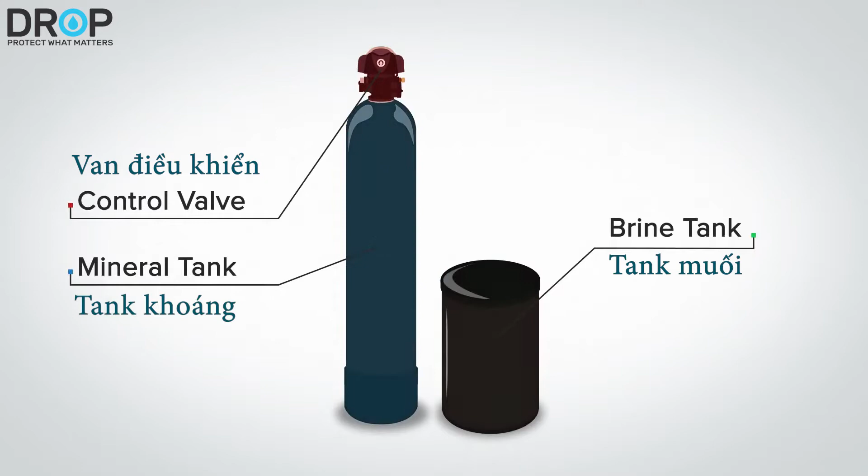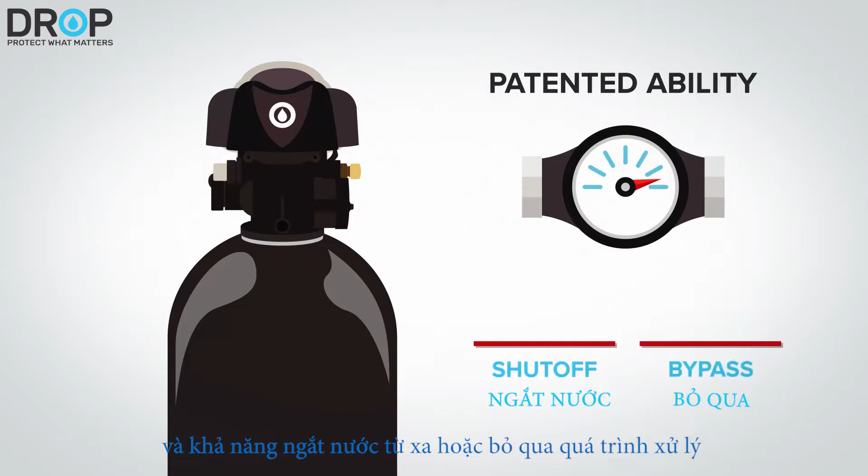The control valve directs the flow of water within the system, and in the case of the DROP control valve, it provides the patented ability to detect excess water use through its built-in water meter, and the capability to remotely shut off your water or bypass the treatment through its unique pro-quality piston design.

Untreated water enters the inlet on the right, and treated water exits the outlet on the left. Contaminants are flushed from the system to a drain from the smaller outlet, also on the left side of the valve. Under the control valve is the media tank.

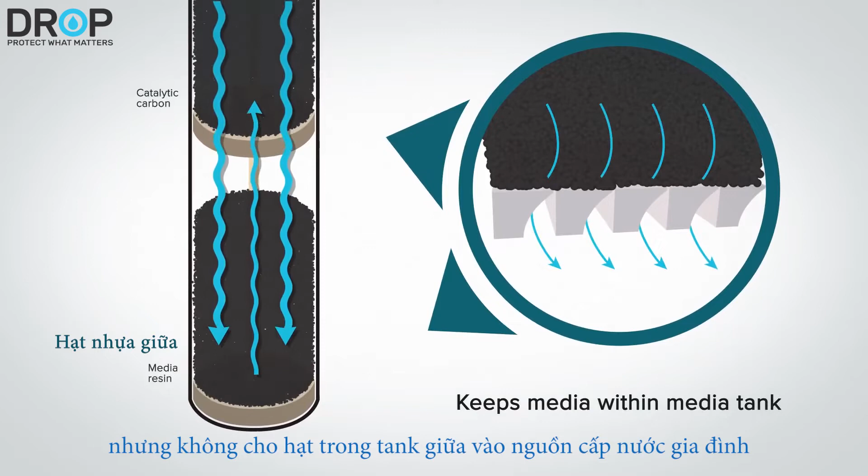Inside the media tank is a tube that runs to the bottom of the tank called the distributor tube. At the bottom and middle of the distributor tube are innovative plate distributors. The plate distributors have many small slits that allow clean water to flow through, but keep the media from entering the home water supply. This unique distributor enables DROP softeners to use less salt and water during the cleaning cycle.

The final element of the mineral tank is the media. DROP City softeners have catalytic carbon in the top portion of the tank for chemical reduction, and ion exchange resin in the bottom. The resin is what removes the hardness from the water.

There are several brands of resin available, but we choose to use Aldex 800 because of its long life, its high efficiency, and because it is made 100% in North America.

Connecting the softener control valve to the brine tank is the brine line. This tube has two functions: it's used to draw the brine out of the brine tank, and it's also used to refill the brine tank for future regeneration. The final component is the brine tank. The brine tank is where salt is added to the system.

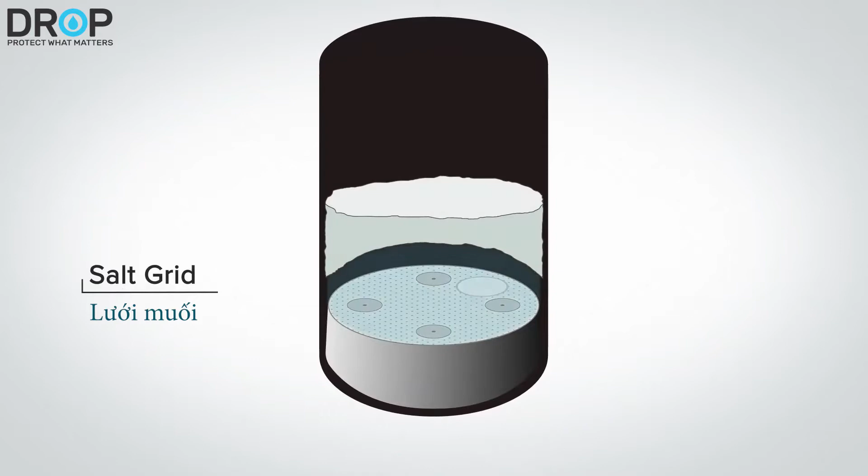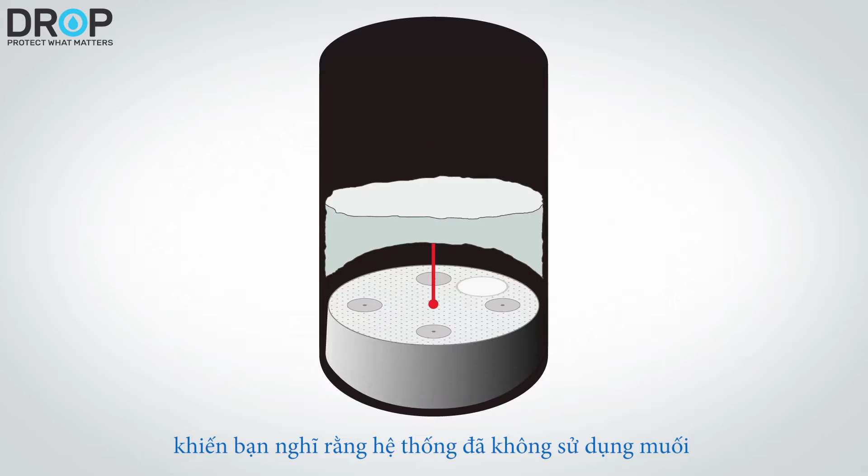Another standard feature of all DROP water softeners is the DROP low salt sensor. This sensor lets you know when salt has fallen below a minimum level before you run completely out, so you have a week or two to get more salt. Low salt notifications, like all system notifications, can be sent via push notifications to your smartphone, text messages, or email.

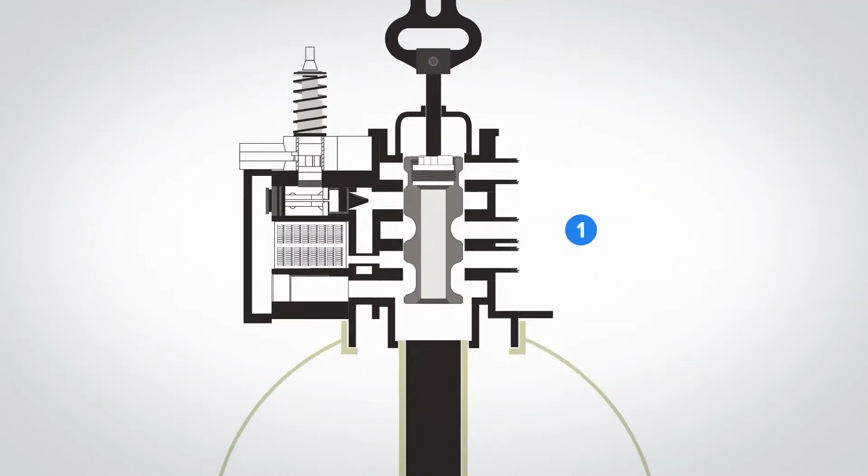Now that you have seen the elements, it's time to see how it works. By following the arrows, you will see the process starts with raw water entering the system. The water is quickly diverted down into the media tank, where it first flows through the catalytic carbon.

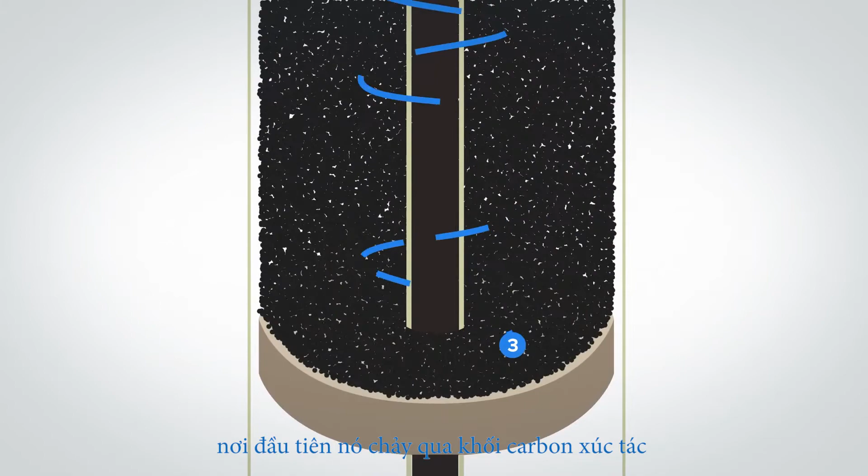The carbon removes chlorine and chloramines, which will improve the taste and eliminate odors. Next, the water flows through the resin. This starts the softening process.

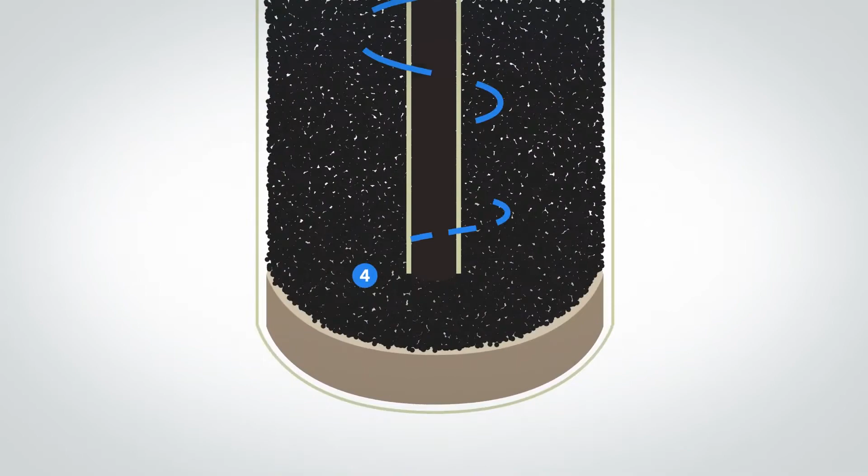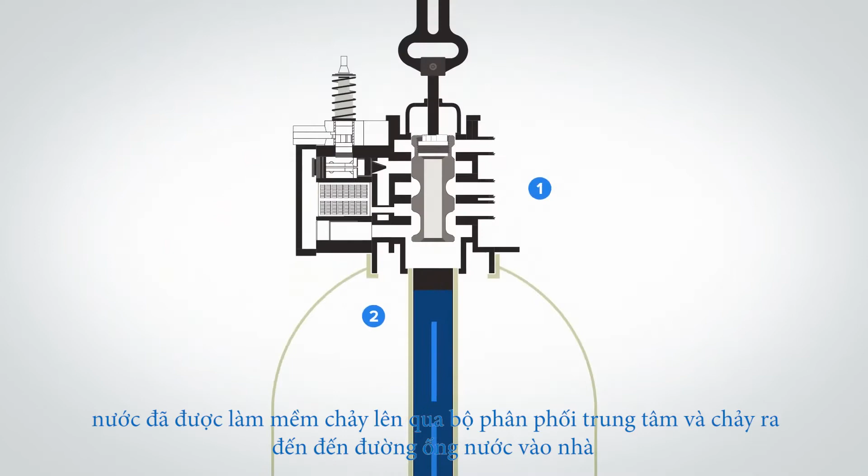Calcium and magnesium are attracted to the resin beads as the water passes through. By the time the water reaches the bottom of the tank, it's been softened. The softened water then flows up through the center distributor tube and out to the home. At some point, the resin will become full of calcium and magnesium and become ineffective.

When this happens, the resin needs to be cleaned of contaminants or recharged. We do this with a process called regeneration. There are 4 steps to regeneration in a DROP water softening system.

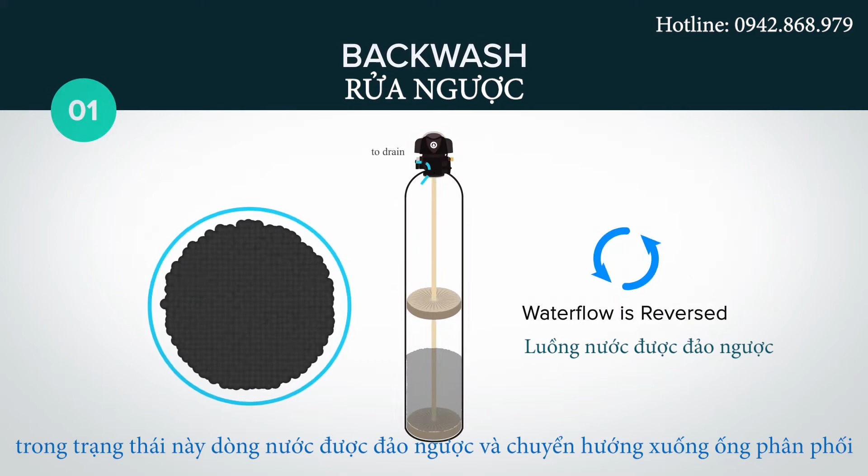Step 1 is backwash. This loosens or expands the resin. In this state, water flow is reversed and diverted down the distributor tube. The water is then forced up through the resin bed. As the water pushes up through the bed, the resin expands and the plate distributor creates a swirling action.

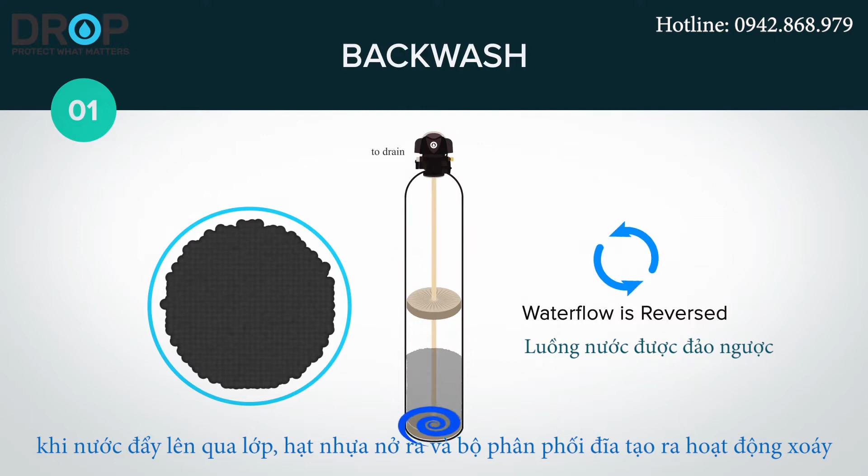Step 2 is brine draw. This pulls the brine from the brine tank and saturates the media tank with brine that is used to release the calcium and magnesium from the resin.

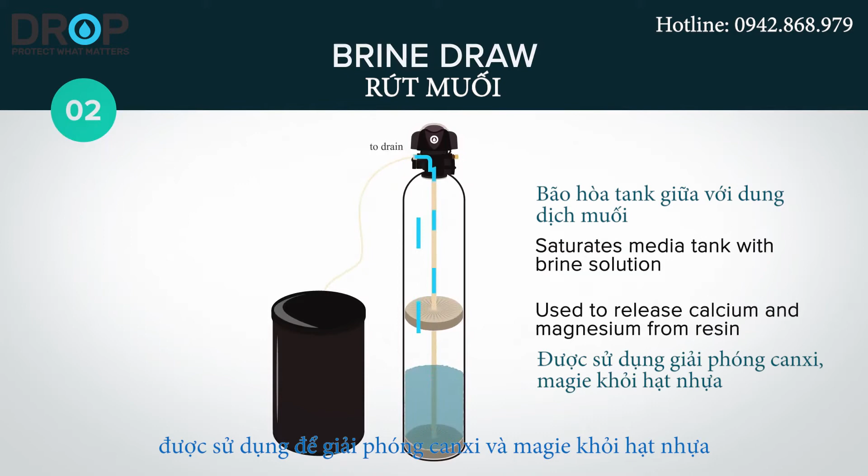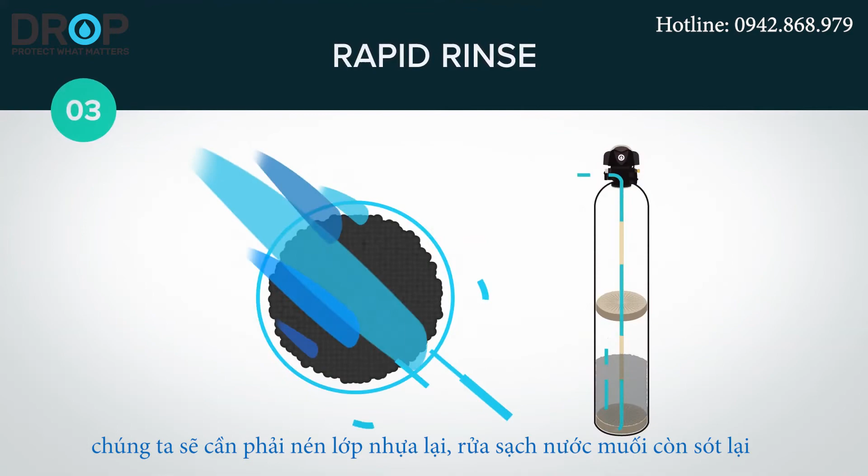Now with the media tank full of dissolved salt water, it's time for step 3, rapid rinse. Since our resin bed is still expanded, we will need to compress the bed back down and rinse the residual brine water and contaminants from the media tank.

Step 4 is brine refill. This completes the process of regeneration and puts water back in the brine tank so it can dissolve the salt into a brine solution to regenerate the resin in the future.

Users do have the ability to move brine refill to the first step if they desire. This is called Pre-Brining. If this option is selected, the brine tank will not have any water in it most of the time. When a regeneration is required, the system will add water to the brine tank about 2 hours before the process begins to allow the water to dissolve the salt into a brine solution. Pre-brining can help keep the salt in the brine tank from bridging, but will delay the regeneration process by 2 hours if you ever want to force an immediate regeneration.

In addition to all the benefits of a premium water softener, the DROP City water softener has additional benefits that are not available in any other water softeners in the world. DROP softeners have the patented ability to shut off water flow to the home.

This puts the ability to turn your water off or back on in the palm of your hand with the DROP Connect app. Even better, when the meter on the softener valve or an optional drop leak detector senses a problem with your home, the DROP softener will automatically respond by turning off your water and notifying you of the issue. Another unique feature offered in DROP softeners is the ability to remotely bypass the treatment.

If you happen to be outside watering the garden and don't want to waste treated water, turning off treatment is as simple as opening the DROP app and touching a button.